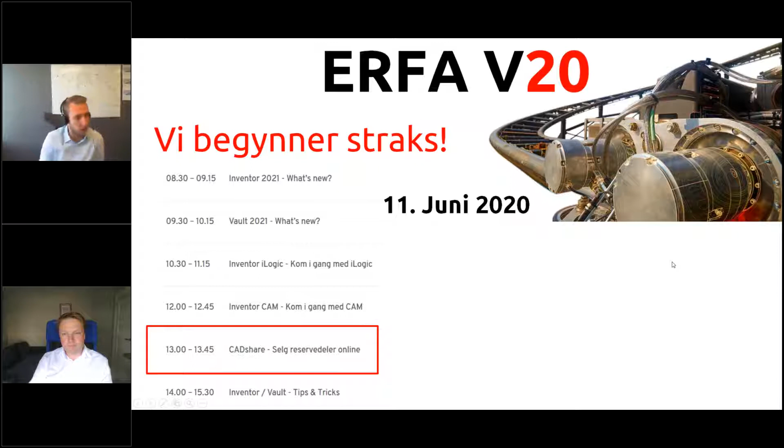I dag har vi med oss Chris Atchison, som er sjefen selv i CADshare, og meg, Markus Gundersen, i NTI. CADshare er et selskap som ble etablert i UK, i Irland, i 2014. Det er et fokusert team med ingeniører og utviklere. De er ganske aktive i UK, og i Norge og i Tyskland. I Norge så er NTI partner, og NTI er for så vidt også den eneste partneren til CADshare. De har kunder innenfor minedrift, agrikultur, maritim equipment og olje og gass, samt konstruksjonsutstyr og process and plant.

Det som kjennetegner suksessfulle kunder hos CADshare er at de leverer utstyr som har høy verdi, sånn at ikke bare utstyret byttes ut, typisk vaskemaskin, men utstyr som har reservedeler. Det er kunder som har press på at utstyret skal fungere hele tiden, at kosten av å ha nedetid er alt for høy, og kunder som typisk har utstyr i tøffe conditions, som det heter på engelsk.

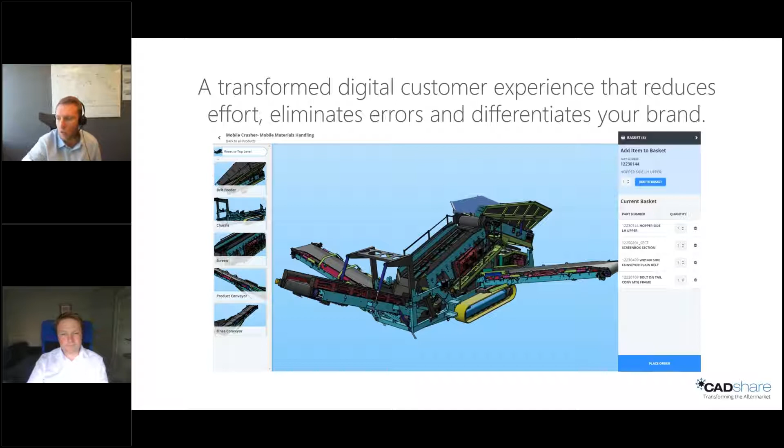Tre gode referansekunder som alle egentlig mener det samme om CADshare. Litt forskjellig sitat, men det går fort å implementere, og det vedlikeholder og bygger sterkere tilknytning til forhandlerne og kundene.

Ser vi på prosessen fra CAD-modell til kundene bestiller deler, så er det ikke veldig mye arbeid hvis du sammenligner med at du skal lage en spare parts list og legge det med i manualen som du skriver ut og sender på pall. Så har kunden tilgang til modellen rett på webplattformen. Det tar 5 minutter for CADshare å gjøre om CAD-modellen til noe lesbart for kunder. Normalt 2 til 3 timer å sette opp

grensesnittet og experience til sluttkundene deres. Og lage forskjellige view og kanskje bedre title og description hvis de på engineering har vært litt slappe med den. Og så kan du samle sammen alt det her og lage de forskjellige manualene som du trenger da, i CADshare. Og så er det egentlig bare å ta imot ordre døgnet rundt. Så kan kunden deres bestille, akkurat som en webbutikk. Når det er bestilt, så får du varsel, og det er egentlig bare å shippe produktet.

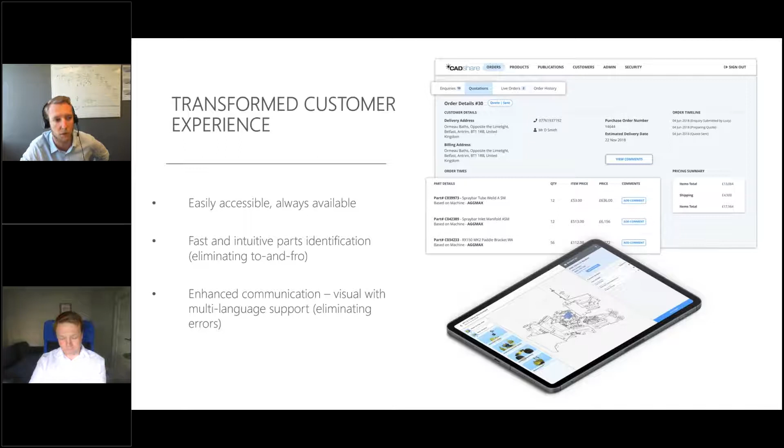Okay, thank you, Markus. Good afternoon, everybody. I'm going to show a live demo of the software in action, but before we do that, I'm just going to talk a little bit about the data structure within CADshare itself, because what we find is that it will answer a lot of your questions that you potentially may have in advance.

So CADshare is a cloud-based environment, and we take in both parts data and CAD data. The first thing that we do in our implementation is build up a master parts data database within our system. That can come from your ERP system. It can come through Excel spreadsheets. It can even be built from CAD models if necessary. But what that allows us to do is to have a single master record for each part number in your system and one in your business.

And what that then allows us to do is enrich that data with other data to add automation, implement workflows, etc. So the sort of things that we look at in the master parts data is defined by the part number, and then of course we have part descriptions, and they can be in multi-languages. Our user interface is available in French, German, and English, and we can have part descriptions in any language that you choose to put in there. When we start talking about ERP integration, then obviously this is where this data would come into stock level, for example, price data, and then other aftermarket type data.

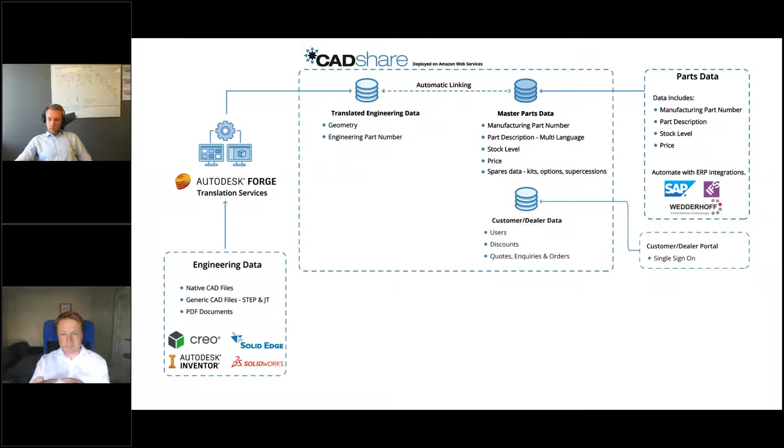And then if you want to hit the button, Markus, we also can finally bring in some customer or dealer data. This can be set up to deal directly to your end user, or it can be set up in a chain where you may have a dealer or distributor in various countries, and it can be managed through that way. Now you can set up different users in there. You can specify specific discounts for different people, and it's also a place where your customers, dealers, and you can see all the quotes, inquiries, and orders in the system.

And we wrap that all together into our remote customer support portal, which is fundamentally about secure 3D part identification. We do support 2D PDFs as well. It's a customized ordering process, so it's a very flexible system that can be configured to match how you probably do business today. And we can also include maintenance information in there as well, and operation manuals, etc.

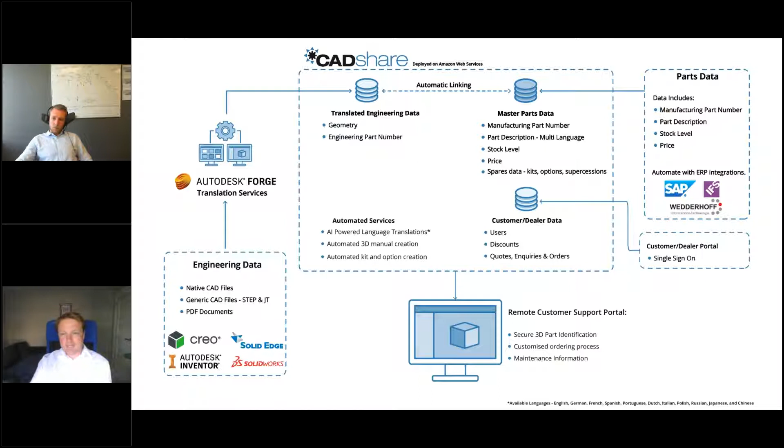And that's about it. When we go through the implementation process, we do a phased rollout. So the first part of that is to get your content creation and data implementation on there, onboarding all your CAD data for your different machines and all your spare parts data.

This is typically how customers tend to roll it out. Then they'll release that to their customers or dealers, and have a manual ordering process where a customer can create an inquiry. It'll come through to you as a quote, and you can provide pricing back, and then they can place an order on the system.

And then eventually, or straight away depending on how you want to look at it, we can get into full integration with ERP, so that multiple data entries are avoided, and all the purchasing and that sort of stuff is automated.

So without any further ado, I'll jump in and give a demo now.

Can you see that okay, Markus? Yeah, yep, okay great. So the first thing I'm going to do is log in as a customer. So this would be what your customers would see when they log into the system. The system can be white labeled, so it would have your branding on here, but the customer comes in and they get access to a tile for every piece of equipment of yours that they have purchased.

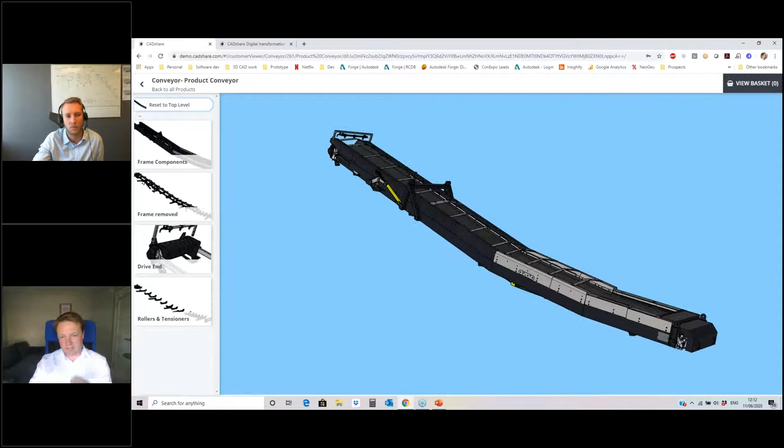On the left-hand side, sorry, in the main viewer here, this is the model, and this is just running on my web browser on a normal office laptop. It's not a CAD machine, and so the customer can rotate and they can zoom in and out, and they can click on items. And when we click on an item, we get information about that in here.

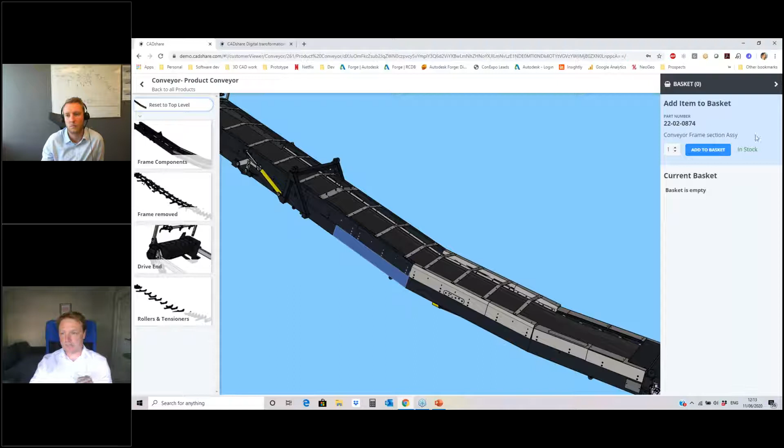So we get a part number, we get a description, and as I said earlier, that description can be in different languages depending on what they've chosen. And they can get stock, and they can also get price. This currently isn't configured for price in this example, but they could also get a price in here as well. And I can pop that into my basket.

On the left-hand side here is various ways that our customers can navigate down through the system, through the assemblies. So for example, if we were looking for some of the internal parts, we can look at this frame removed, and we can also ghost hidden parts.

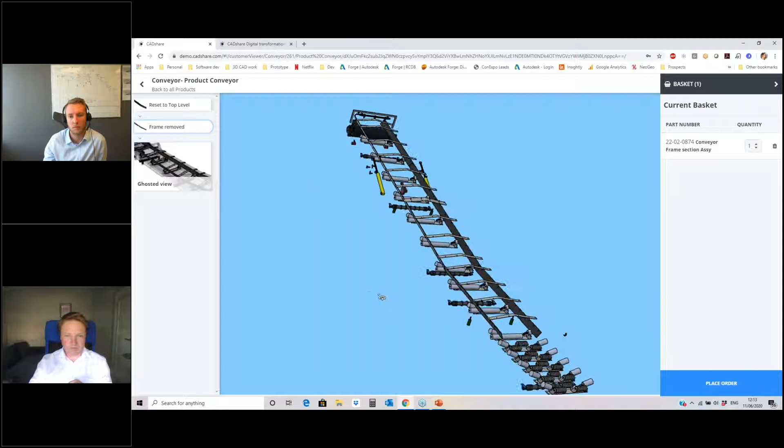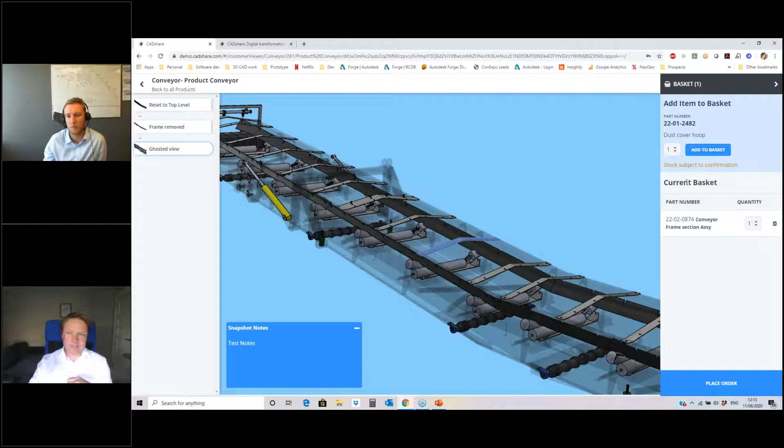So here we have like a skeleton view. If we come in here, we can ghost so that there's a faint outline on the rest of the machine that's hidden, to give some context, but nothing can be selected that is hidden. So you can still select the parts that are visible, and pop that into the basket, which is very useful sometimes to give some context.

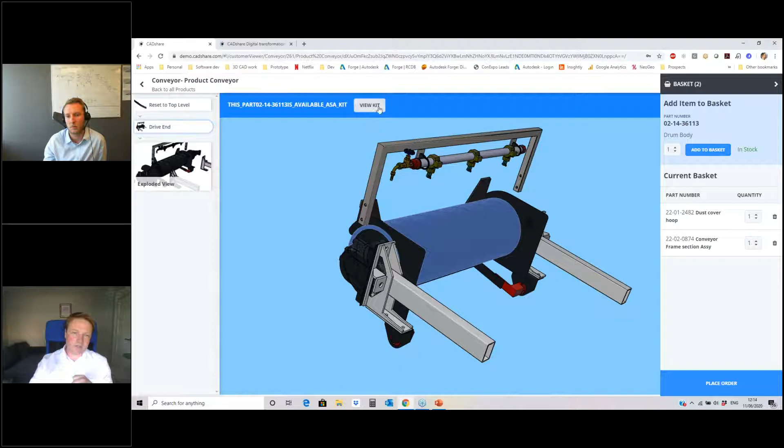Some of the more advanced features that we have would be around kits, for example. So if a part is selected that is available as a kit, you can see here I can either buy that part individually, or I can see that it's also available as a kit. So if I view that, it tells me what the kit is, the description of it.

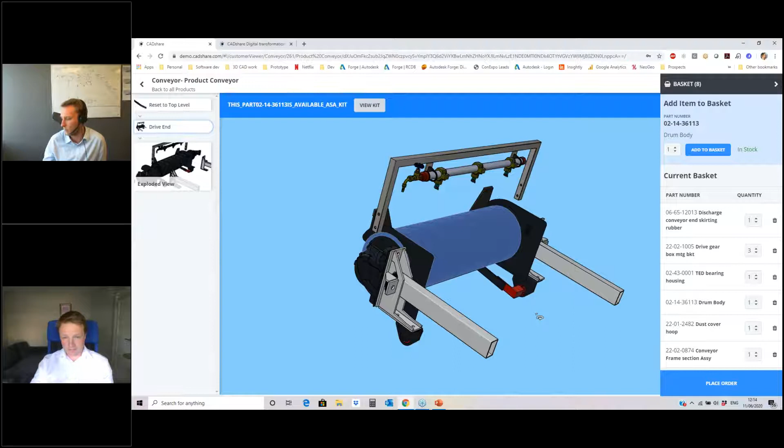It can show me all the parts that are in that kit, and I can pop them into the basket. And because you're creating those kits in your master parts data, when you create it once, that will filter through all your CAD, all your published manuals like this. So you only do it once, and it will appear in all your models where that part is available.

We can also define assemblies that can be purchased. So say, for example, this is a spray bar here, and this is a poly tube. So say that tube had a crack in it and it needs replaced.

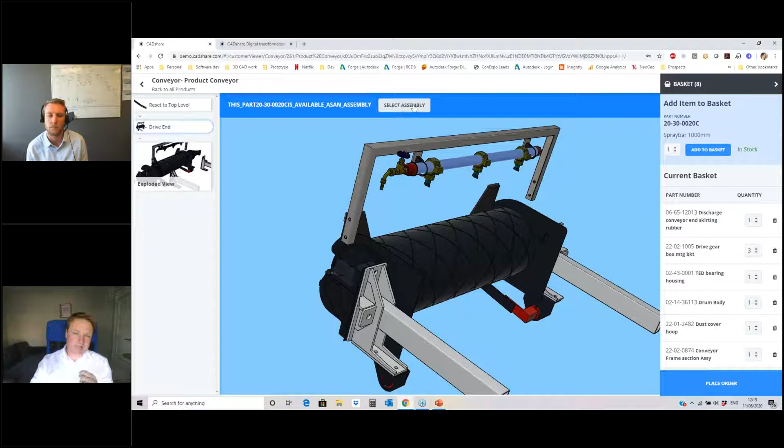I click on it, I can see I can buy the spray bar, but I can also see that it's available as an assembly. So if I click that, I can see actually I can buy this whole thing pre-assembled as one part number. And as a maintenance guy, I'd probably think hard about that, because it only really means taking off a couple of nuts to replace that, rather than having to strip off the fittings and fixtures just to replace the poly tube.

So I'll pop that into my basket.

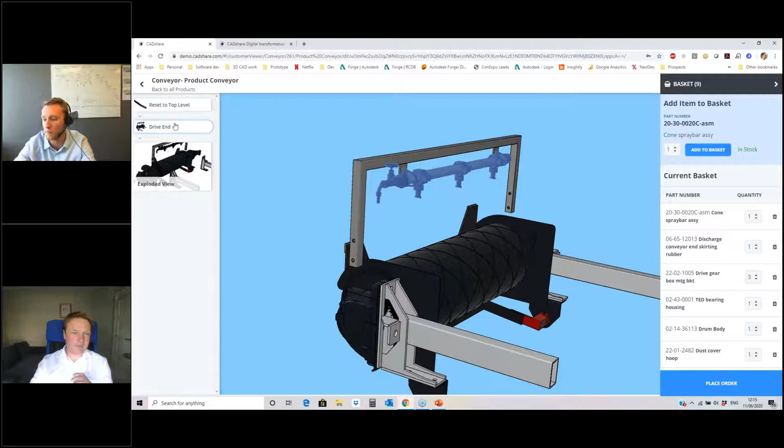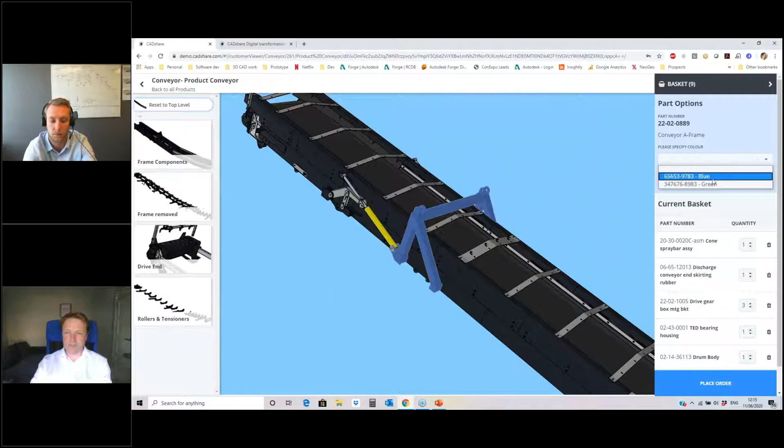We also allow you to set up options for parts. So if I click this part, I can see over here I get a part number and description, but it's also asking me to specify a color in this case. So you have full control over the question that's asked and then what appears in the drop down. So I'll take a blue one this time, and I'll add that into my basket.

So once you've done all that, and you're happy with what you've identified, you can place the order. Out of the box, there's an inquiry, quotation, order workflow. So you can see at the minute there's no price in here. There's some stock information for parts that we have that information in the system for.

We just select the address. We can create a new address, name and number, and a requested delivery date. And in here we can still remove things from the basket. We can manually add a part. So if I want to add some parts, and I kind of know what the part numbers are, I don't necessarily want to go through a 3D model to be able to select it. I can come in here and add a part number, and pop it into the basket as well.

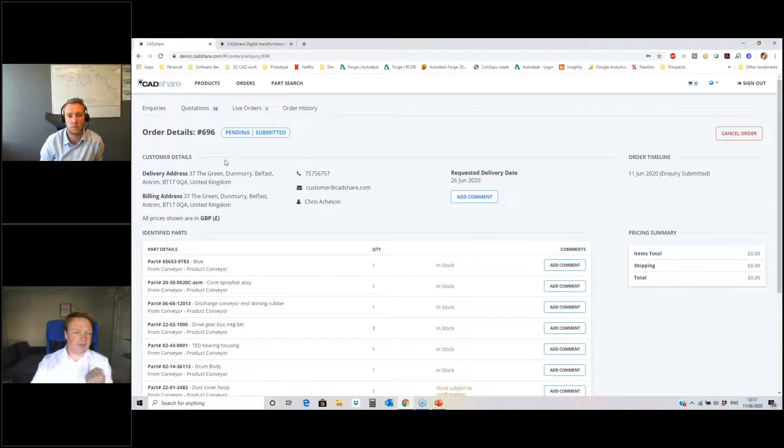And then simply submit that as an inquiry, and that's now become an inquiry here in my system. So we're now in the orders part of the system. We can see how many inquiries I've got. I can see this has been submitted. It's now pending, so I'm waiting for the manufacturer to send me back some pricing.

I can have a look at my quotations, where I've had pricing back and in stock, and I've had delivery date. There's also comments, so we can add comments either at the top order level, or we can add a comment for a specific item in the inquiry if you have any questions, or the customer's not quite sure if they've ordered the right part.

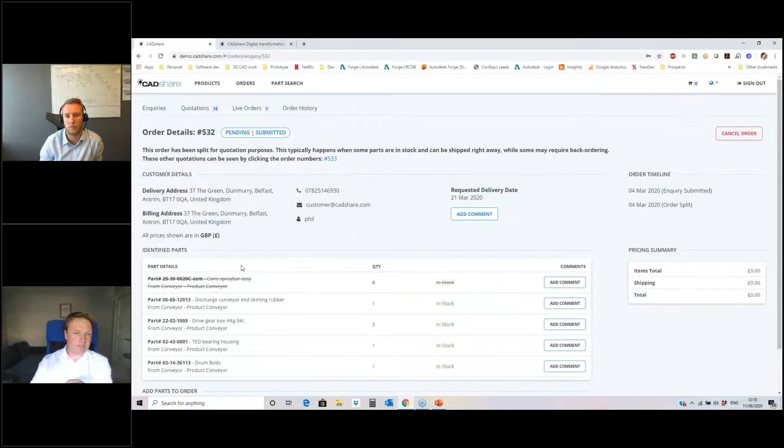You can see that this order is actually a split order. So when the inquiry originally came in, most of the parts were in stock. This one wasn't, so we split them out into two separate orders, two separate quotes, and you can see a link back to the original one. So this is still an existing one that we all have in stock, they're all in stock, so we can get that out the door. There's the part that's been moved to the other quote, which is going to take a little bit longer. That way the customer can order those separately and allow you to process the parts that you've got in the system.

And through the live orders, where the customer has put in a purchase order and that's been shipped, you can see there's a timeline, etc. down here.

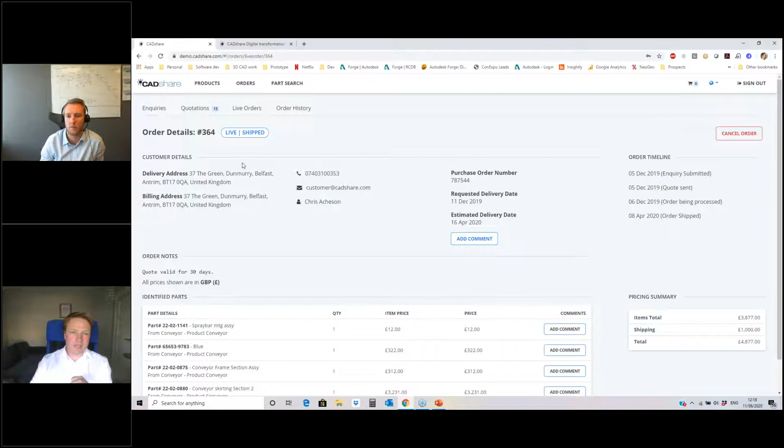The other part we can do here is part search. So again, if the customer wants to find parts, we can come in here and search by a part number, and that will return all the parts that I've requested there. And again, you can add them straight into your basket. You can also search by part description. So say I'm looking for a roller for the conveyor - there's all the rollers that have come in here, and again we can pop those into the basket.

So at a fairly high level, that's the customer side. You can see it's very quick and easy for them to pick up and use. It works on a tablet, it works on a phone as well, so it's pretty much anywhere where they can get a Google Chrome browser, it works. So we have customers use it in the office, and we have customers that take a tablet out beside the machine to identify and order parts.

So I'll just sign out now, and sign back in as a manufacturer, which is your side of the application. So you can see, first of all, we've come straight into the orders page - this is the inquiry that I just created. Again, this is live, it's not on my laptop, it's running in the cloud. You can see the orders come in straight away. We can view that inquiry.

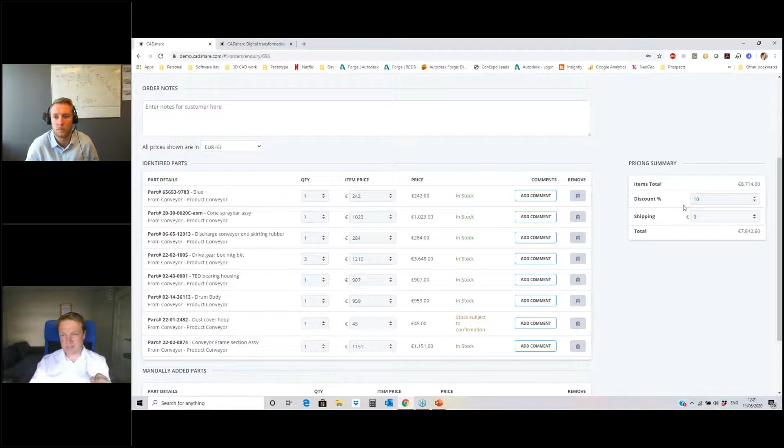There's one part that doesn't have a price in the system, so we can pop that in. We can change the currency, and there's another one, and then over here we can add a discount. If you don't add a discount, it won't be shown to the customer as a blank space - it just won't be shown at all. We can put in the shipping estimate as well, add any notes that we want, and again we can split the order, save it as a draft, or simply generate that as a quote, and that will go through to the customer now with all that pricing in place.

And then move through the system pricing, and again this can be integrated with your ERP system, so that this information can be sent to the ERP system. The pricing can be pulled in from the ERP system, and your existing engineering systems can work in concert with CADshare. Now if I just go into the products here, this is where we upload and build the 3D experiences.

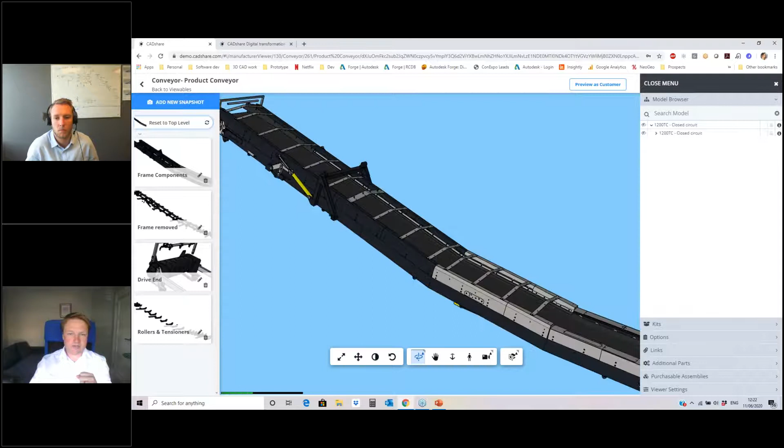So if I just find that conveyor that we just looked at, and we view it, so you can see here it's very similar to what we saw in the customer view, except we have a lot more functionality over here.

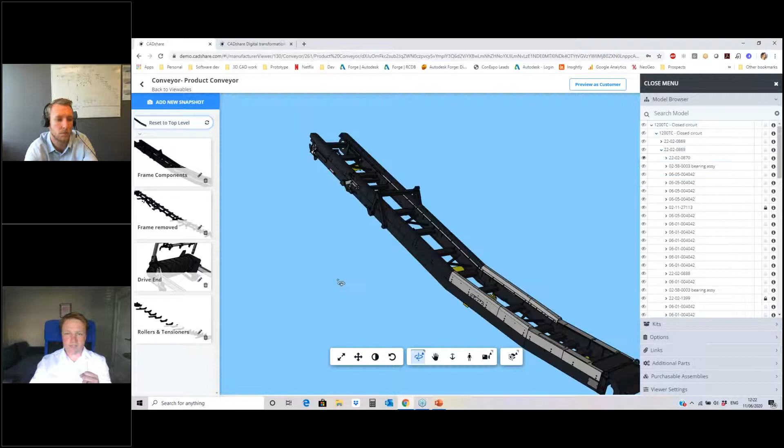So we have the model tree, which allows us to create these 3D experiences very quickly. So for example, we can turn things on and off. So if you just wanted a snapshot with just the frame, simply turning those bits off, and adding a new snapshot and giving it a name.

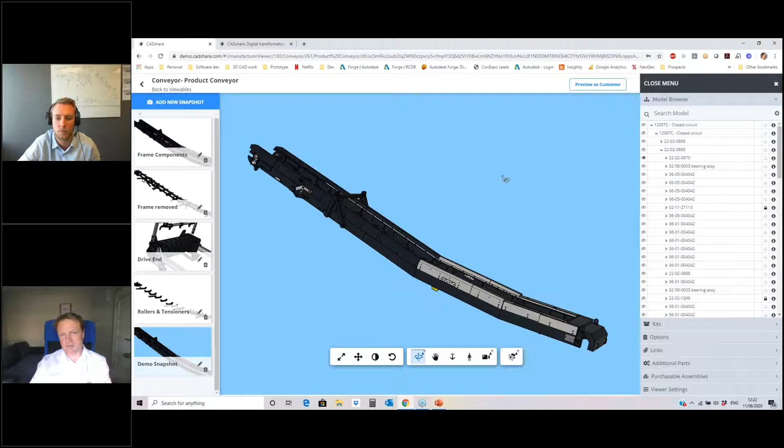You can see there's a difference here in the white background here and the blue background here. So you can configure exactly what color is shown in the background. I just have this set to blue from a previous demonstration, but if I set that to white, then it'll flow through here as well. You can set whatever color you want in the background.

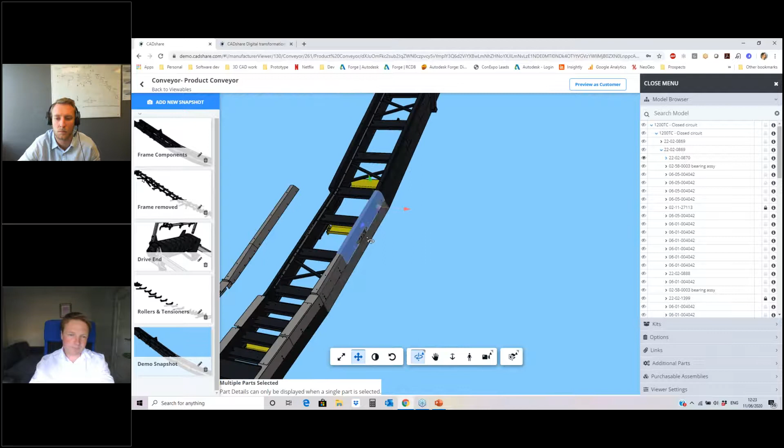If you want to do more detailed exploded drawings, you can use the explode function, which will radially explode parts, or you can use the translate function, which allows us to select multiple components. If I hold down the control key, I can select multiple components and just pull those across. And we can do that on both sides. And pull those out and just add that.

We can now save that as a snapshot, and the location of those parts will be maintained. If you click on the part, we can see the details down here, so we can edit the part number if we need to, but also you can see the part description. The part description is managed through the master parts area where that data is available.

So for example, if we change that part, if this part's been superseded by a new part, and that part is in our master parts section, if we just change the part number here and save that, the new description will be pulled through and your customer will see that instantly.

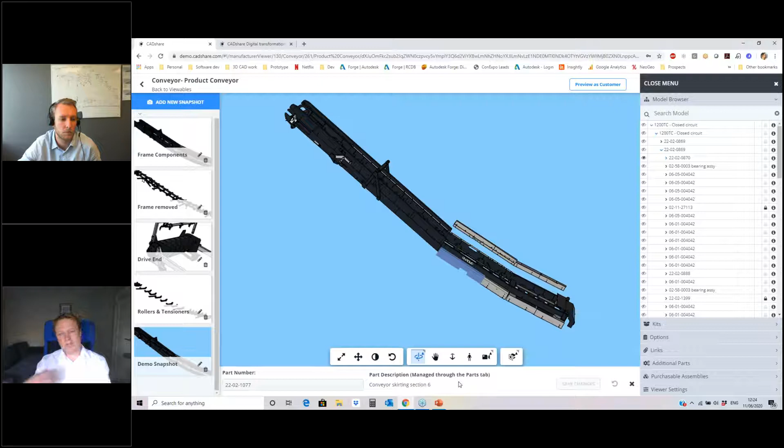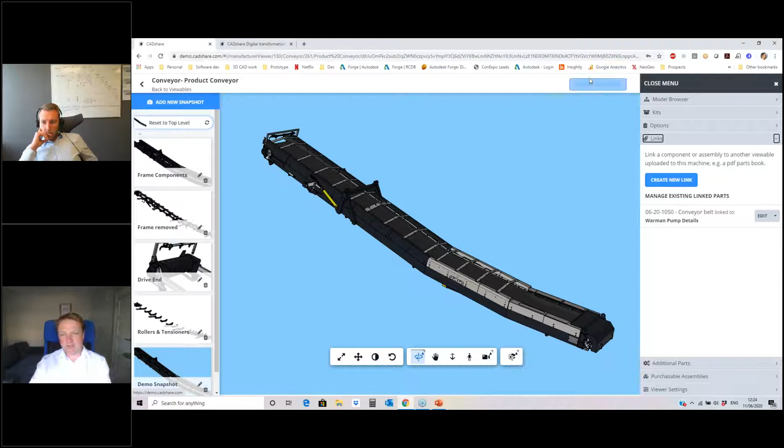Down the right hand side is just where we create the things that we talked about, that we showed you in the customer side. So the kits, the options, links we didn't talk about. So you can create a link to, if I preview this as a customer, you can create a link to between viewables, and we can do 3D or 2D viewables. So for example, this is a bad example, but I've just set this up so you can see how it works.

If I click on the belt, it takes us to a different viewable, so I can have a look at that. And in this case, it's taken us to a pump diagram.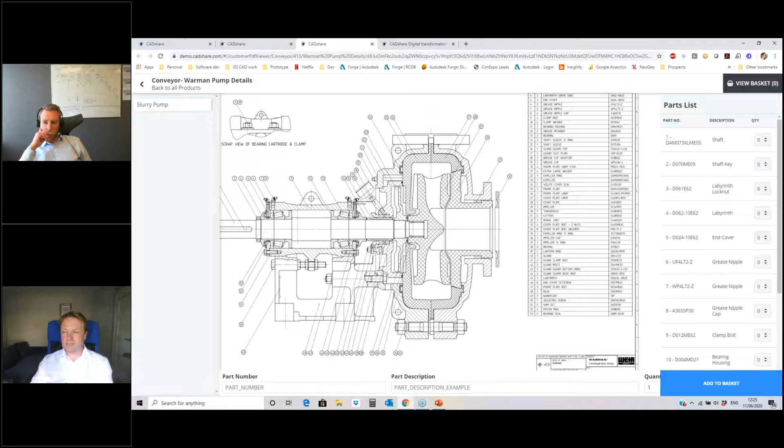So for whenever you have some bought in parts, maybe it's a pump, maybe it's a gearbox, maybe it's something else you don't have 3D data for, but you do have 2D content from the manufacturer of that piece of equipment that's on your piece of equipment. It would typically be handled this way.

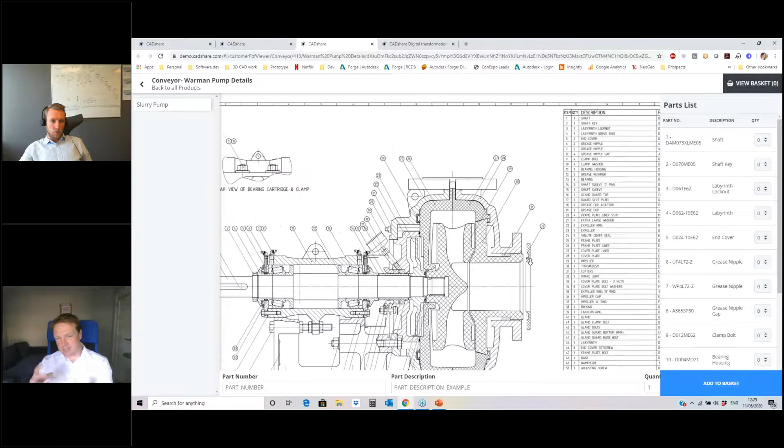So the customer can come in here, they can identify the part that they need, and over here they can specify a quantity and add that into the basket. And like I say, that can be linked to a 3D block within the model.

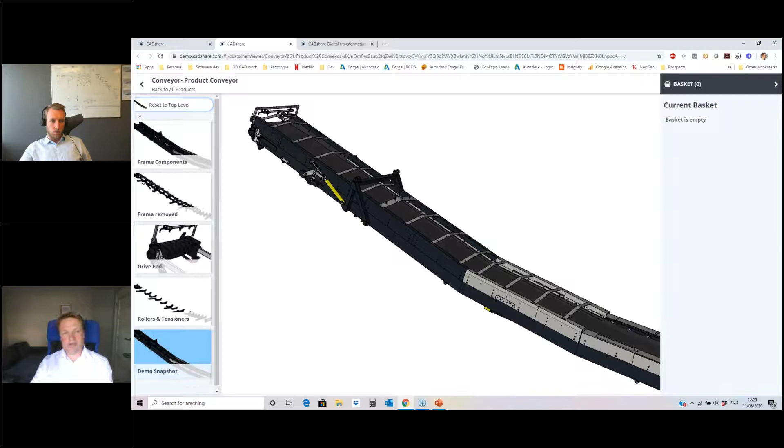We can also deal with superseded parts. So if you have an assembly in this model that gets updated or superseded, instead of having to upload the whole model again, you can simply lock the component in here and link it to the new version of the part, and that will be brought through to that. And that actually, one thing I didn't show you is that we can lock items.

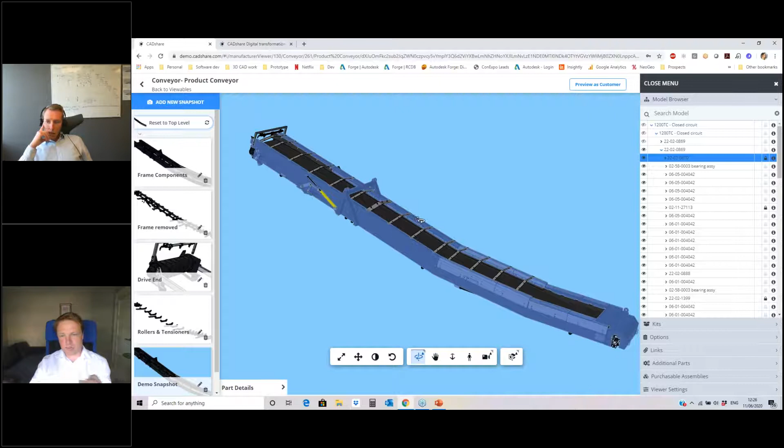Say for example, it's probably not a realistic scenario, but say you only sold that frame as a single part. At the minute we can choose any part in there. If we just click the lock symbol here, then no matter what part I select on that frame, it'll select that whole thing. So that will be replicated by your customer - they can only select those parts and add that assembly no matter where they click, and add that into the basket.

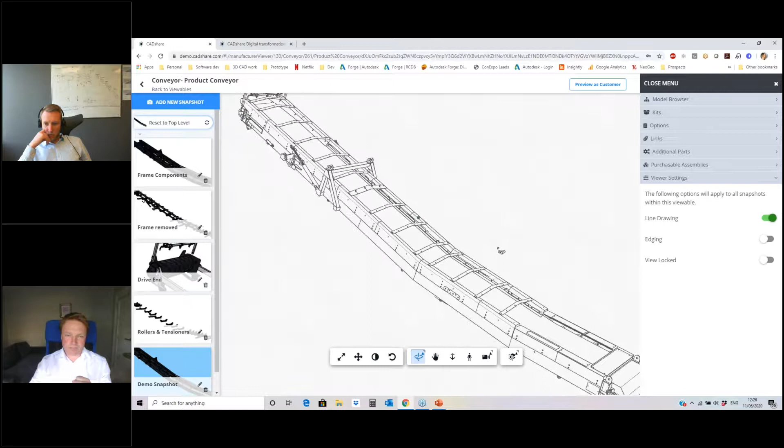Some of the settings we have down here, so we can turn edging on and off. At the minute edging's on for this, which makes it a lot clearer. We can put it into line drawing mode, which some of our customers use just because it simulates a traditional PDF. All the same functionality is there, but it just looks like the way customers are used to looking at paper.

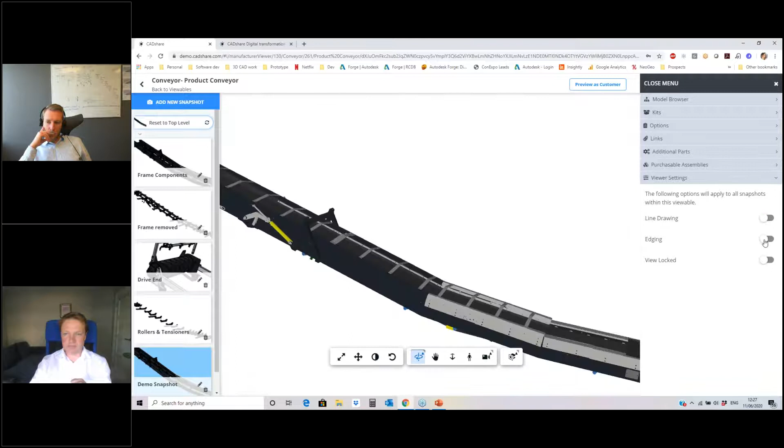And you can also lock the view. So if you want to lock the view to stop your customer rotating things so that they can only zoom in and out, then you can do that here as well. Totally up to yourself how you handle that.

Publications is where you bring everything together. So you can bring together any number of 3D models and any number of 2D content and maintenance information, and publish that in a manual to a specific customer.